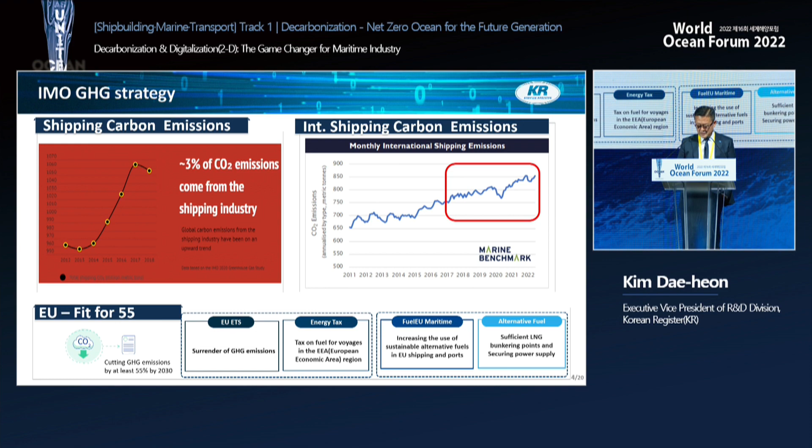Throughout the cycle of vessel fuels, we have this concept of well to wake that forces us to be carbon neutral. This will take effect starting from 2023, one by one. So it's a very heavy topic, and this is an immediate challenge that we have to respond to. For these challenges and requirements, we're bound to try to find some answers.

The bridge technology, as President Kim mentioned, and other technologies deal with this topic. Speed reduction to produce less CO2, filtering the generated gas mechanically and chemically, and using fossil fuels while adding additional technologies to meet the requirements. We have different approaches, but with stricter regulations, there seems to be a limitation in meeting these targets using present technologies.

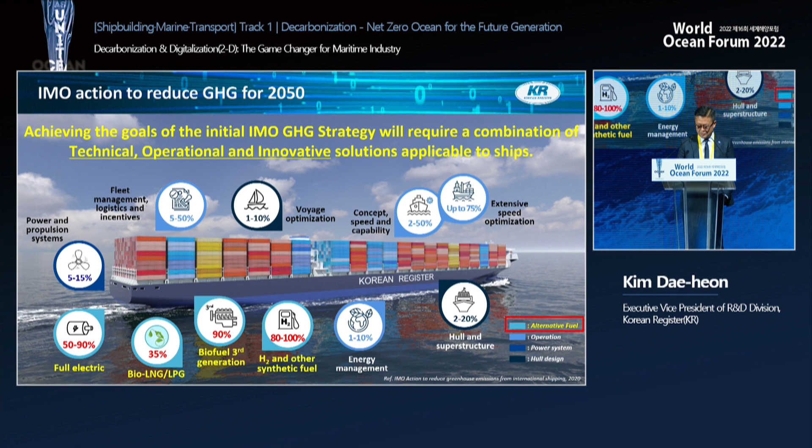What's in light blue shows alternative fuels. It can be seen as a bridge technology: biofuel, bio-LNG. These are the various types of alternative fuels we can turn to. In the field of alternative fuels, you have already seen these kinds of graphs. This is based on Clarksons research.

Let's assume that there are three types of scenarios: existing fuel oil, LNG fuel, and last but not least, zero carbon fuel. By 2050, zero carbon fuel will take up 79% of the orders, and the conventional oil fuels may not be existent by 2030. That's what it says. When this graph first came out, not many people agreed with this idea. But as we're approaching 2030, we can resonate with this.

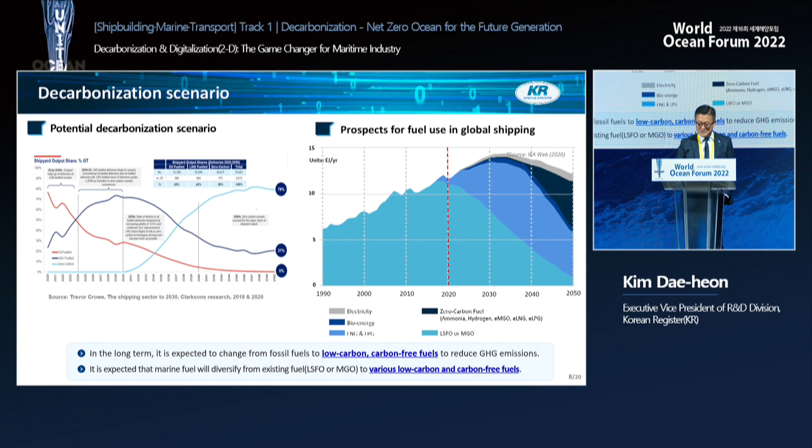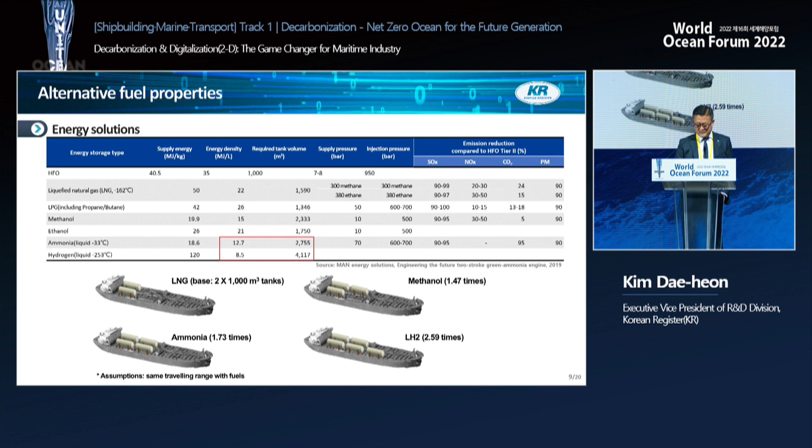Starting from 2020, you can see that actually there are different types of fuels being used. When it comes to alternative fuels, there are many of them, starting from HFO. Starting from the second row, you can see that there are many different types, and we have to consider different physical properties, energy density, and so on. Considering energy density, we need a bigger capacity for storing this particular type of energy source.

And regarding alternative fuels, we're going to look at two different types. First, methanol. This was not highly popular, but last year, a very big shipping company, Maersk, placed an order for 12 container ships. So methanol caught many people's attention. Unlike other alternative fuels, this can be handled at room temperature, and its engine is already proven. So these are the advantages of methanol.

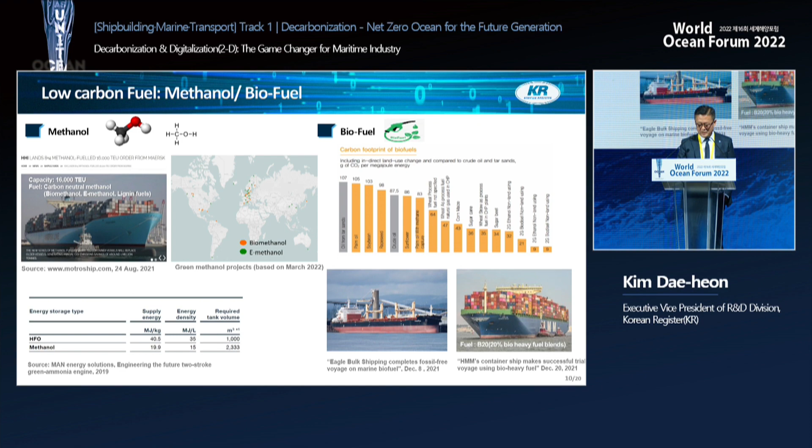But still, methanol that is extracted from fossil fuels cannot be used, so it really depends on how we can create green or blue methanol markets. And next, biofuel. It's not based on fossil fuels, so it does have values as carbon neutral fuels. And we can blend this with existing fuels to meet the targets of 2030. And existing ships and shipping companies that use existing ships are very interested in biofuels.

Next, net zero sources, which don't contain carbon at all. Examples can be ammonia and hydrogen. So in terms of R&D, we believe that this can be commercialized in 2 or 3 years, and we are making preparation for the use of these net zero carbon fuels.

But for ammonia, we have to consider energy density because it's related to tank capacity, and also toxicity and its high auto-ignition temperature. And as it produces NOx, we need to find more ways or answers to dealing with ammonia as an alternative fuel.

In the case of hydrogen, it's very difficult to use in the gas form, so it has to be liquefied hydrogen. And it is liquefied at the temperature of minus 253 degrees Celsius, which is much lower than that of LNG at minus 162 degrees. So the materials for the fuel tanks have to be developed first to use it as an alternative fuel in a full manner.

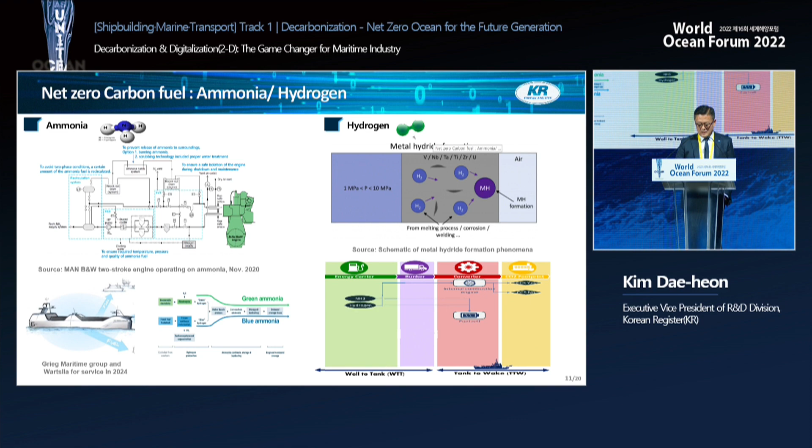In introducing alternative fuels, this is basically creating a new path because this is something that we haven't done before. In terms of technology and operation, this is a whole new concept. And as we can see from the media coverage, accidents happened because the technologies involved in these accidents were not used before. So with that in mind, in participating in technology demonstrations, and in order for these technologies to stabilize in the field, we are diversifying R&D activities.

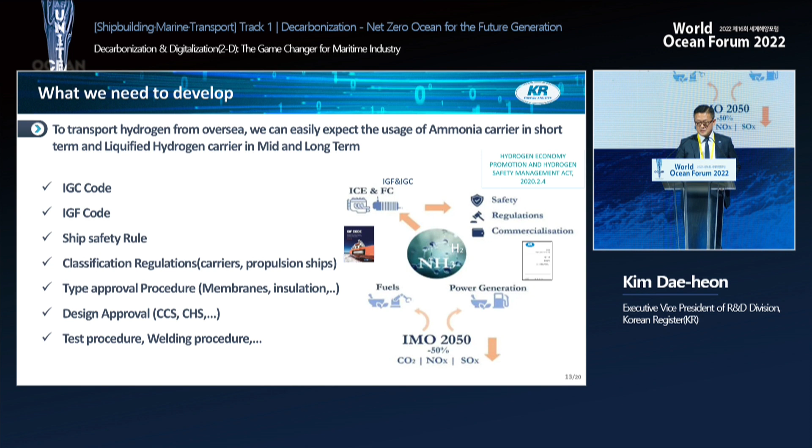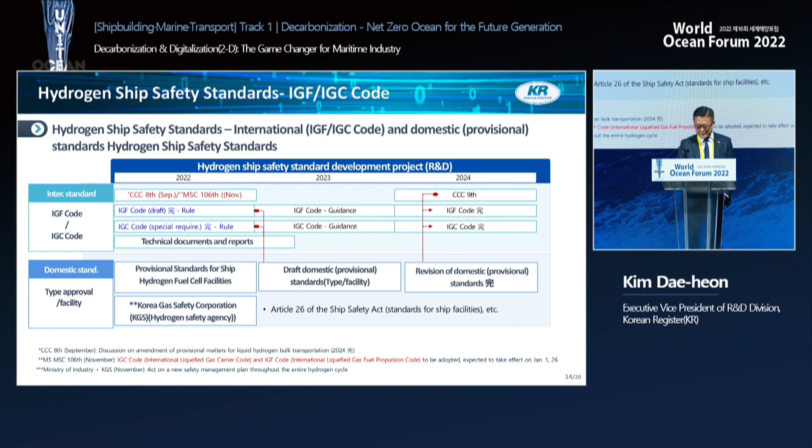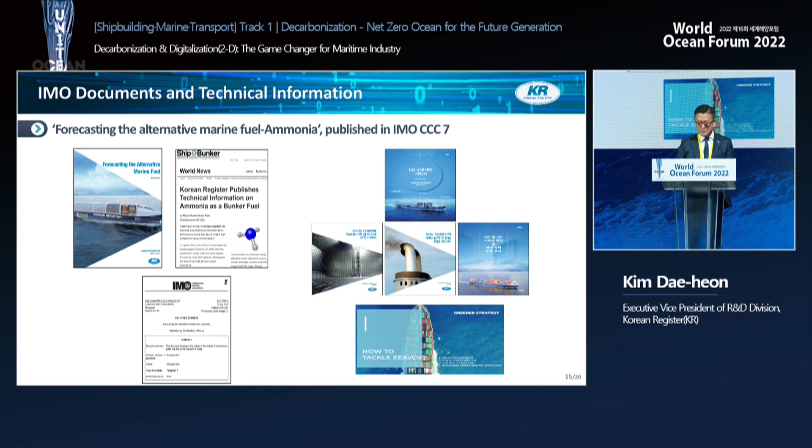And as you can see from the slide, we specify different international codes like the IGC code and IGF code, and we are raising voices so that we can be heard by the international organizations. And all these details can be found in the technical documents that we published, and we submitted these technical documents to international organizations.

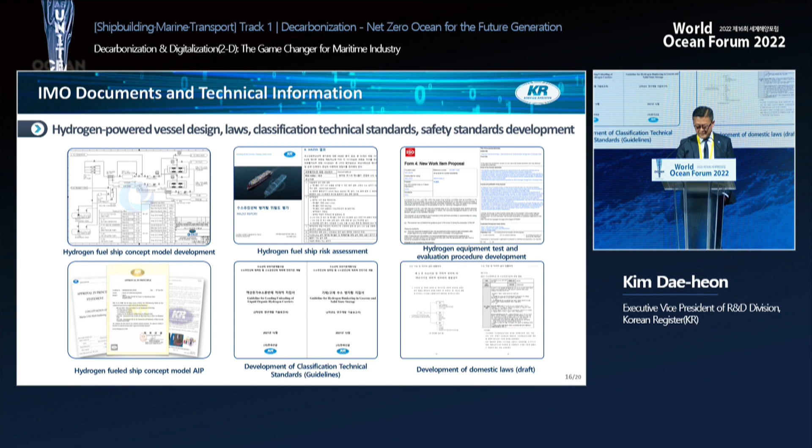And when it comes to hydrogen, it's actually catching attention from many industries faster than ammonia. We do have preliminary standards and draft ideas, but for hydrogen, we might need some more time to make this concept more detailed.

My last slide is about decarbonization, and is it something that we can avoid? Well, actually, this is not something we can avoid, and we have to be ready for the transition towards decarbonization. And the technology for decarbonization is already in the shipping industry. I studied naval architecture, and with the introduction of eco-friendly vessels, I believe that affected the curricula of Korean universities. So these technologies are already reflected in the curricula of universities and in the industry as a whole.

We already looked at previous presentations, and we talked about how different parties, including shipping companies, the industry and R&D experts, can play their own roles and join forces because they have different ideas. And for these technologies to settle in the market, we need systems and regulations. First, we have to have clear ideas as to what the future directions of regulations would be, and I hope the government can provide us with guidelines in our journey towards decarbonization.

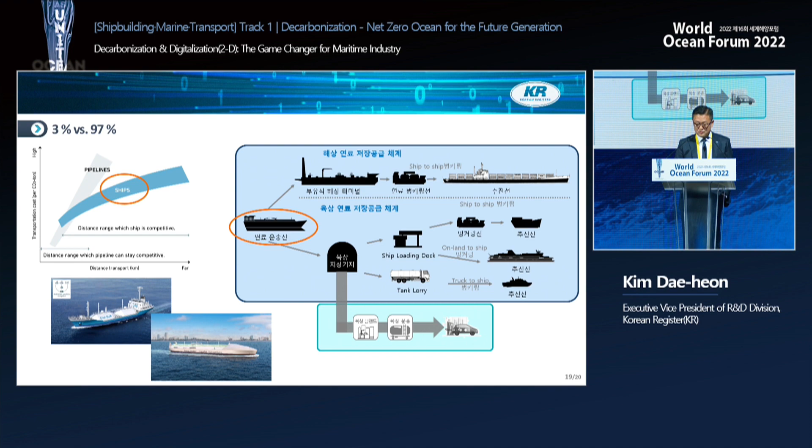So starting from decarbonization technologies toward more effective and eco-friendly technologies for transportation, I believe we can make a better contribution. Thank you.